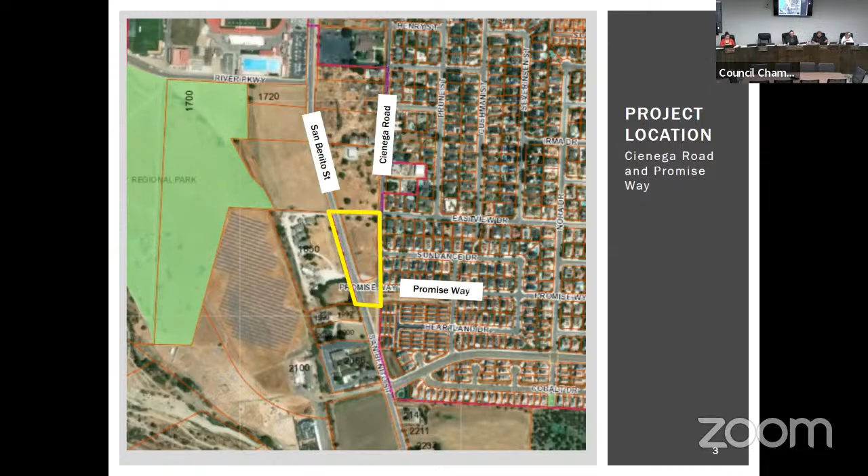To give you a little bit of background, this project has been under review for quite some time. On July 26, 2022, the applicant submitted an application for review. When an applicant submits their application for review, the planning division routes it to everyone within the development review committee. We meet with the development review committee and gather everyone's comments. There could be design comments at this point in an initial review, though there probably isn't because we're missing some information. But what we do is wrap together what we have and then distribute it to the applicant as one complete package.

And we did that on August 24th. As required by the Permit Streamlining Act, we are required to give them a list of everything they need to give us within that 30-day period for completeness.

The applicant then resubmitted in September. We then sent them comments in October. The applicant then submitted on June 8th and it was deemed complete.

The way that the Permit Streamlining Act and the Subdivision Map Act work is that once a project is deemed complete, we then have to move the project forward. We had to make a CEQA determination within 30 days of completeness. That was done, and once that determination is made, the Subdivision Map Act requires us to bring the project before the decision-making body, in this case the Planning Commission, for a decision on the project. So that's how we got to where we are tonight.

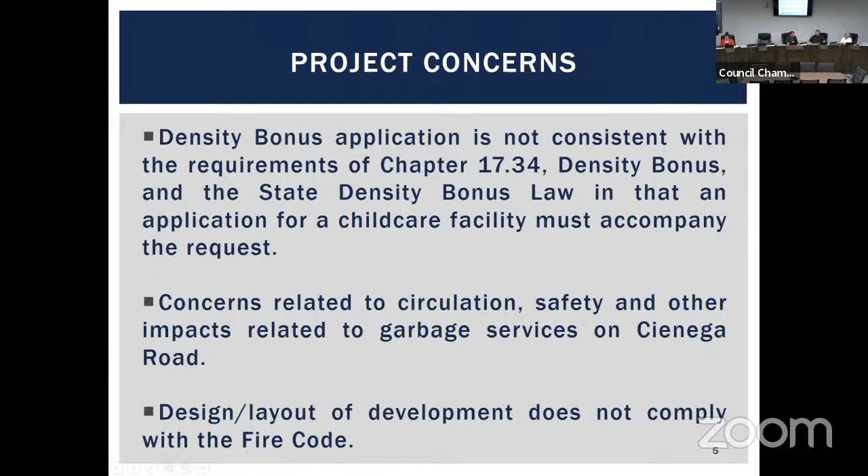With regards to the density bonus, in the last submittal we had two options submitted. That was because the preferred option has always been option A, which includes a childcare facility, and staff has had comments on that from the beginning. So in the last round there are two options, and I'm going to talk about both of them so we can fully discuss their project.

As far as the density bonus goes, they're proposing to restrict one unit for very low income, which is 5% of the total number of units. Because of that, they qualify for a density bonus. As part of that density bonus, they are requesting a waiver of development standards such as setbacks and lot coverage, which they're entitled to. They then get to have a density bonus of units, and what they're requesting is the maximum, so that's 4 units.

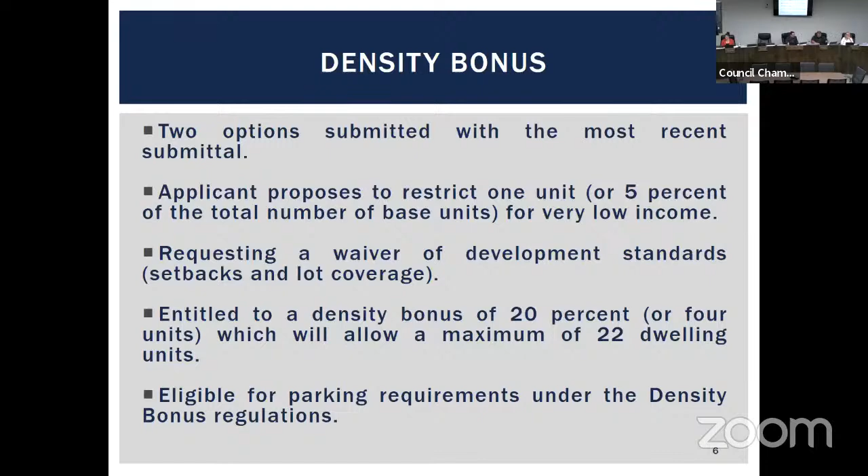That's allowed by the density bonus chapter as well as state density bonus law, so they are entitled to that. This increases their density on the site up to 22 units, and they're eligible for the parking requirements under the density bonus. With regards to option B, it meets all the requirements of the state density bonus law and our chapter 17.34. So there's no density bonus concerns with option B; it meets all the requirements.

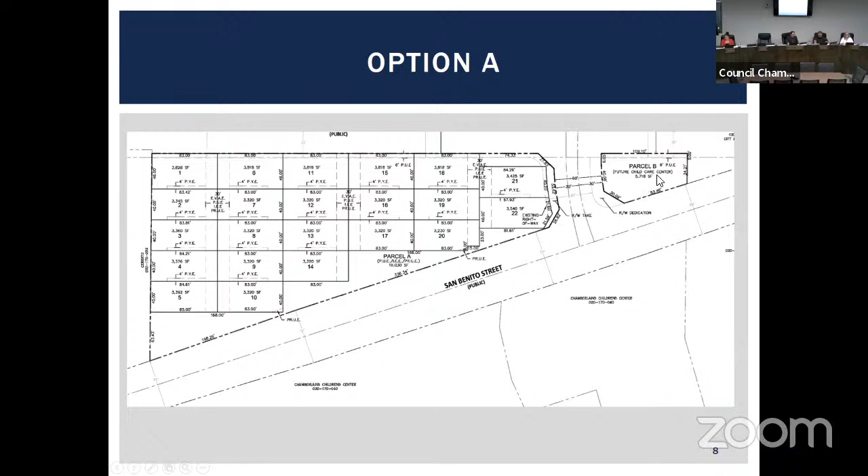Option A, however, then changes things. So option B has 22 lots for residential, and lot 21 becomes a larger lot, with this remainder lot becoming another house. Option A then changes it so all 22 are located within this area, and a future childcare facility is proposed on parcel B.

The concern that staff has with that is that both the density bonus law and chapter 17.34 are very specific on what needs to occur for a density bonus for a childcare facility. The bonus allowed is either related to the floor area or square footage of the childcare facility. So if you had a high rise, let's say, and 5,000 square feet is going to be a childcare facility, they get an extra 5,000 square feet as their density bonus if they wanted. Or they can have an additional incentive that contributes significantly to the economic feasibility of the construction of the facility. So the bonus that they're requesting has to be tied to the construction of that childcare facility.

As part of this density bonus, the applicant is requesting a waiver of the annexation fees for all the units, which is currently $13,500 per unit. The fee doesn't get paid until building permits are issued, so that fee will likely go up, but it would be a fee that the city would then pay on their behalf to the county.

As noted many times to the applicant, we are requiring a site and architectural review for the childcare facility. That's how we can first make sure that the incentive they're requesting is related to the construction of the facility, and also make sure that a facility could actually be constructed on the parcel. Our code requires that if you are requesting a density bonus for a childcare facility, you must apply for a site and architectural review and conditional use permit. It's in the code.

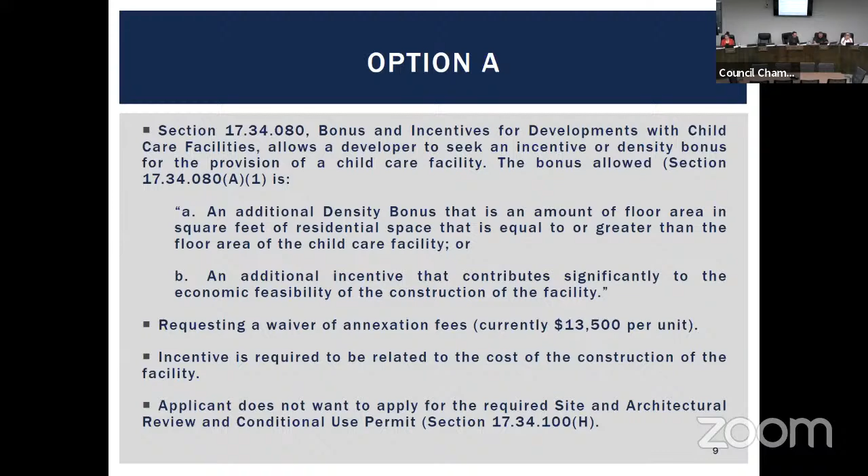This is a blown up image of the childcare facility. We don't have an application in for it. It's a 5,700 square foot lot. Can a childcare facility fit there? I don't know, I don't have the plan, I don't have plans in front of me. So that's another thing we're checking.

Could it fit? They're going to have parking, a play area, and then a building. Part of the reason for requiring that site and architecture review is so we can make sure it can be constructed, and that it will be constructed, since they would be requesting an incentive related to that.

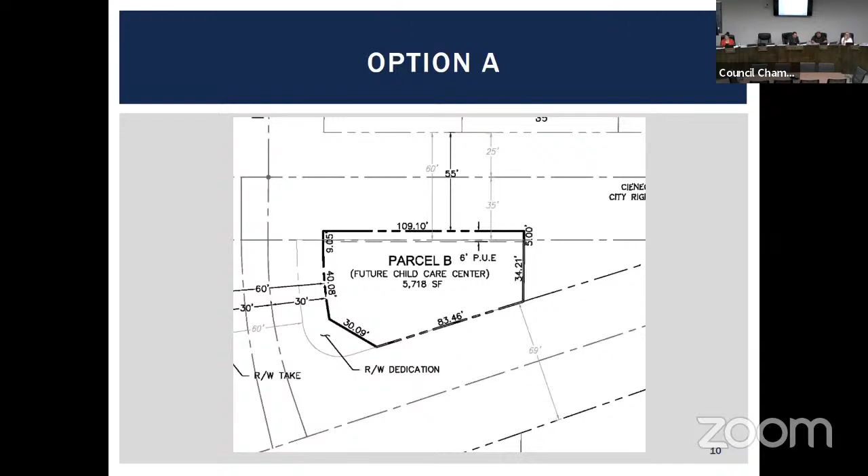As far as garbage service goes, this has been a comment from the beginning. Recology informed the city that they could not provide front door service because their trucks cannot back up the distance of the roads. So Recology said they would only serve them on Cienega Road, meaning every house has to take their can out to Cienega Road.

Every dwelling unit is now required to have three waste receptacles: trash, recycling, and organics. So at a minimum, there will be 66 cans on Cienega.

Now, if there's a JADU and an ADU on the site, there will likely be more cans, because you are likely going to require the person in the ADU or JADU to have their own trash service. If that were to occur, we would have a total of 198 cans on Cienega.

Each house with only 3 cans would require a minimum of 11 feet on Cienega Road if they perfectly place their cans.

Due to the layout of the roads, making sure that sight distance is maintained so people entering and exiting the development can adequately see onto Cienega to exit, and then the corner, there's likely only 6 feet available per house on Cienega. The larger concern is that this requires perfect can placement even with only 3 cans per house. It is unlikely everyone is going to go out there and make sure they are no more than 18 inches away from their neighbor's can, perfectly placed on Cienega.

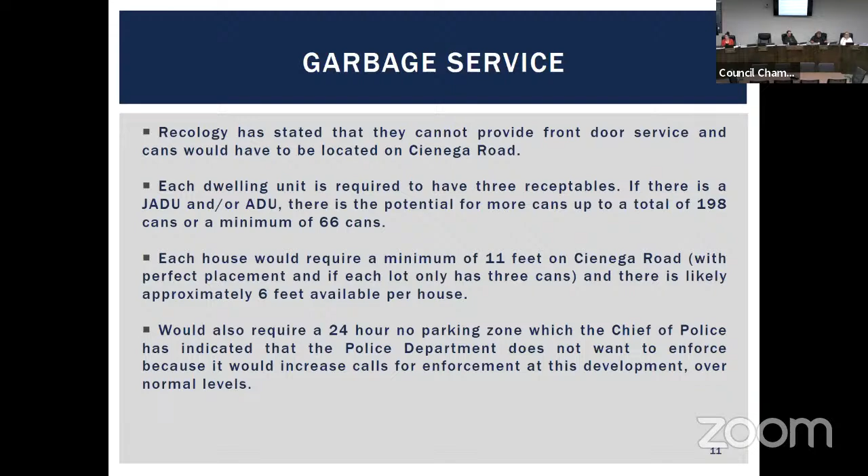Since the beginning, this has been a major concern for staff because of the likelihood that people are not going to place it perfectly. We're going to impede circulation in the area. And then, not necessarily a safety concern but expressed from the beginning, is that if you are in one of these lower lots, let's say 4, 9, 5, or 10, and you bought the house when you were younger and now you're older, or you have mobility issues, you have to take a can all the way to Cienega. And you have to find space for it. And it's 3 cans, you're going out 3 times. Right? So that is a concern that we have.

Just as allowing people to age in place or people with mobility issues, what happens 20, 30 years down the road if the layout is the way it is with the cans on Cienega?

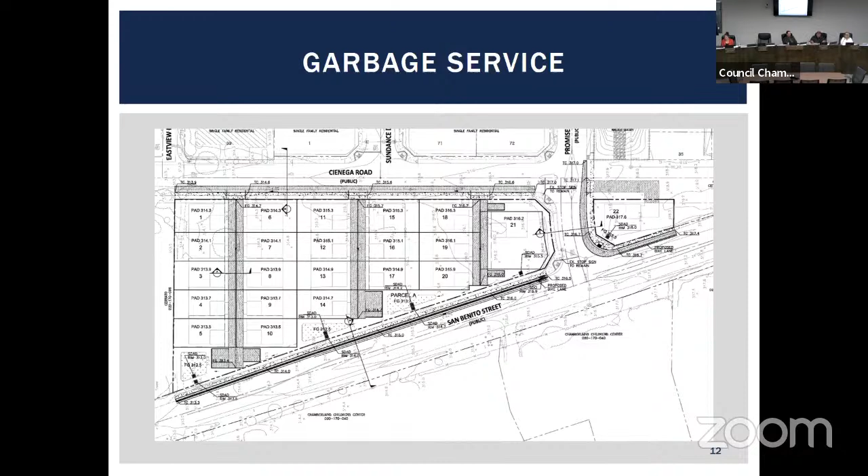The biggest concern that staff has is in regards to life safety. The fire marshal determined that the project does not comply with the fire code. The fire trucks cannot travel down those roads. So the fire truck cannot travel down this road and then back all the way up. So the fire truck will have to park on Cienega.

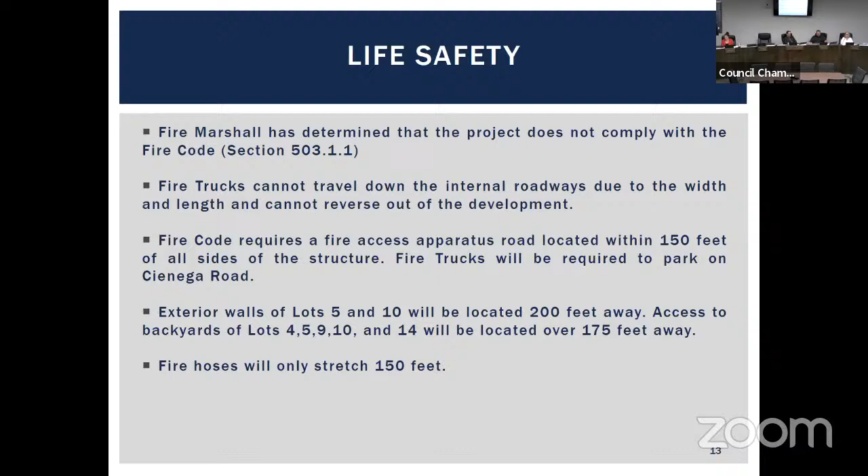The fire code requires fire apparatus roads to be located within 150 feet of all sides of the structure. So what that means is the fire truck will park on Cienega, and then there are a number of houses where the 150 feet rule is not met. So for example, if the fire truck parks on Cienega, these houses, all sides of the structure would be further than 150 feet away. Because there will be cars, potentially trash cans, potentially both on Cienega, it's likely that we'll also have an issue with these houses as well because the fire truck will have to be parked further away.

I am not the expert on fire code, so Charlie Bedoya, our fire marshal, is here tonight and he will go over the fire code from the fire marshal perspective.

Yeah. I'm going to switch. Chief Bedoya has a presentation as well.

Thank you, Commission and Mr. Chair, for having me. My name is Charlie Bedoya, and I am the Fire Marshal with Hollister Fire Department. Thank you for having me here tonight. And it's not just about fire hose, it's about actually fire apparatus access.

I have a quick little presentation. What do I press? Right arrow? Okay.

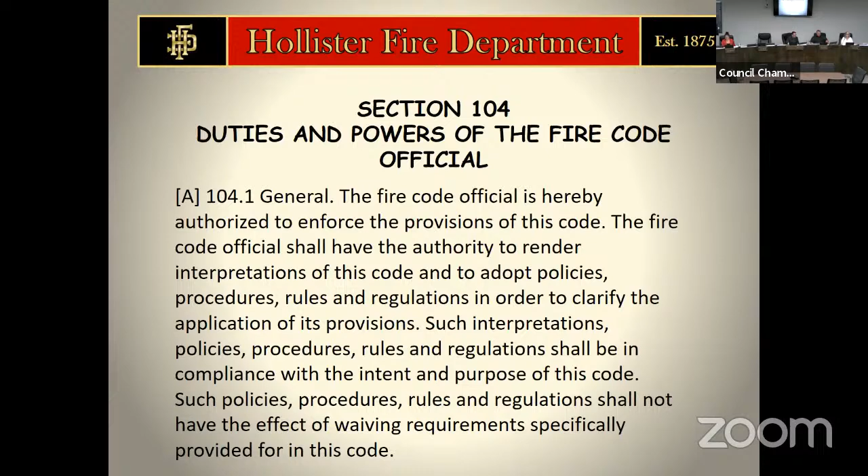Perfect. So this is straight out of the fire code, section 104, duties and powers of the fire code official. 104.1 general: the fire code official is hereby authorized to enforce the provisions of this code. The fire code official shall have the authority to render interpretations of this code and to adopt policies, procedures, rules, and regulations in order to clarify the application of its provisions. Such interpretations, policies, procedures, rules, and regulations shall be in compliance with the intent and purpose of this code. Such policies, procedures, rules, and regulations shall not have the effect of waiving requirements specifically provided for in this code.

So section 503 on fire apparatus access roads. 503.1.2, additional access: the fire code official is authorized to require more than one fire apparatus access road based on the potential for impairment of a single road by vehicle congestion, condition of terrain, climatic conditions, or other factors that can limit access. 503.2.2, the authority: the fire code official shall have the authority to require or permit modifications to the required access widths where they are inadequate for fire or rescue operations, or where necessary to meet the public safety objectives of the jurisdiction.

And then dead ends, this is what it's all about. 503.2.5, dead ends: dead end fire apparatus access roads in excess of 150 feet in length shall be provided with an approved area for turning around fire apparatus.

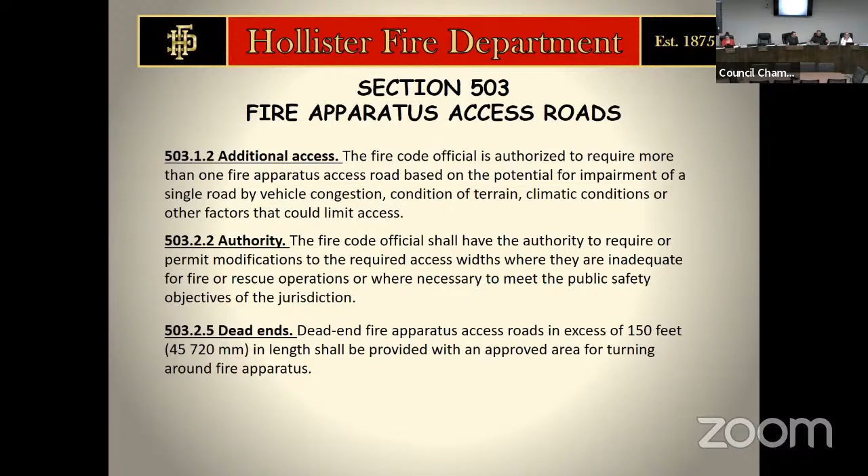Section D103, minimum specifications, access road with the hydrant. So this is just good information to have out there. Where a fire hydrant is located on a fire apparatus road, the minimum road width shall be 26 feet. So fire access road is normally 20 feet, but anytime you put a fire hydrant on the road, you have to expand it out to 26 feet wider. It took me a few years to catch that, but I finally got it and understood it after being here for a little bit.

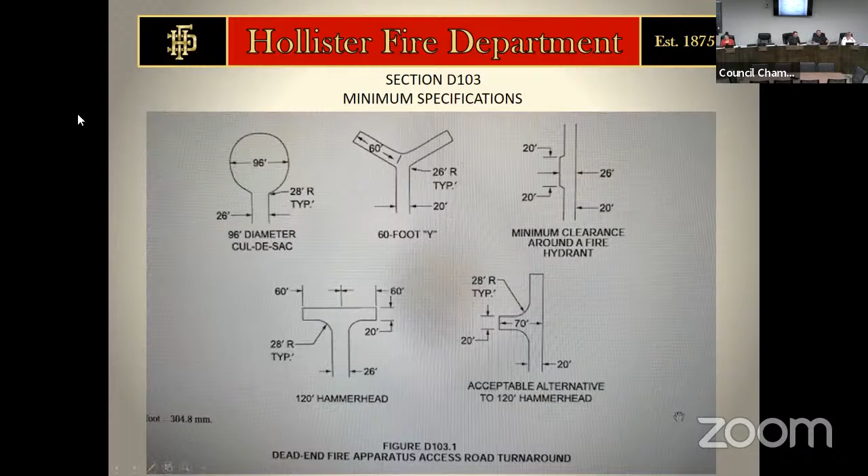Then you get into the 501 to 750 range, it gets into 26 feet, and over 750, we have to figure out something else, probably a second access or a third access.

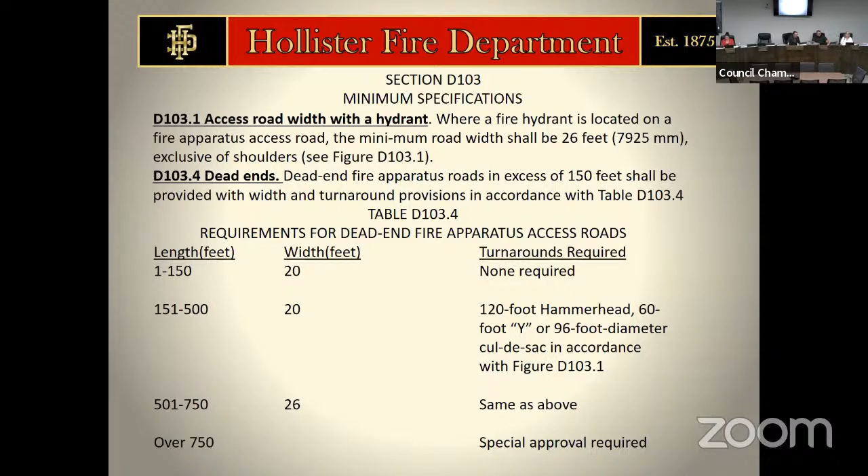You have to understand, on those fire apparatus roads, you have to put up some signs, either paint the curbs red that says fire lane no access, because roads 20 to 26 feet, you can't have parking on both sides of the roadway. If you have roads 26 to 32 feet, you could only have parking on one side.

So these developments usually can't have parking on any parts of the roadway. That would impair fire apparatus and even the garbage trucks too, but I'm more concerned about the fire apparatus. Wider than 32 feet, then parking is allowed on both sides.

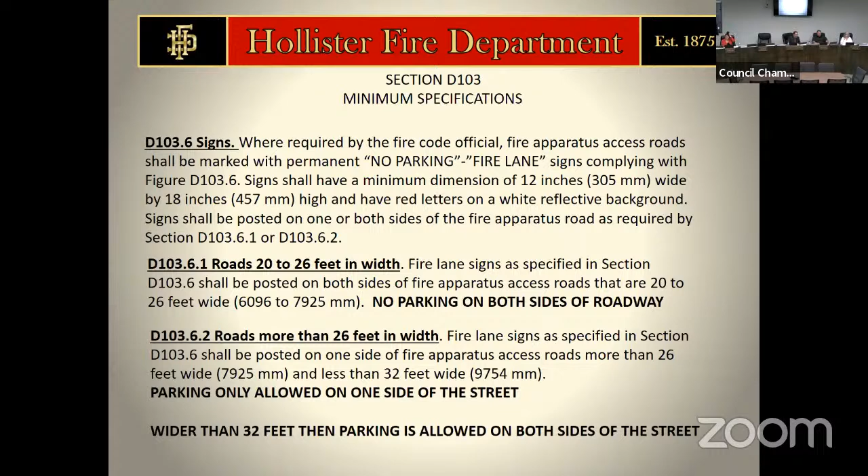So with that, I did some investigations on some developments that we've had in town. Heartland is one of the developments, across from the Presbyterian Church on Cienega Road. I was told Heartland doesn't meet it, that Heartland could get away with it. So I went down to Heartland. If you look at Heartland where the T is in the middle, you see how it tees off.

I went to one of the driveways down there. The streets are 20 feet wide, but they're only 144 feet in length. So does that require a turnaround? No, it doesn't. It meets the code, and I showed the measurement right on that part.

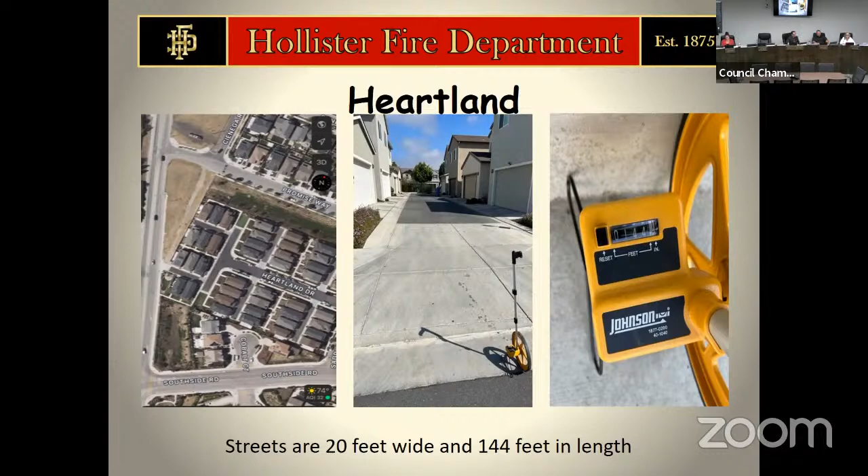Also in Heartland, you see the hammerhead or the T over there. I measured from the middle of the T to the end - it's 115 feet one way and 115 feet the other way. But if you look, it's red on both sides of the curve too, because it doesn't meet that 32 feet or 26 feet in width. So that whole T is red, fire lane, no access.

So that gives us the proper turnaround to be able to pull in, back up, and turn around where we need to go.

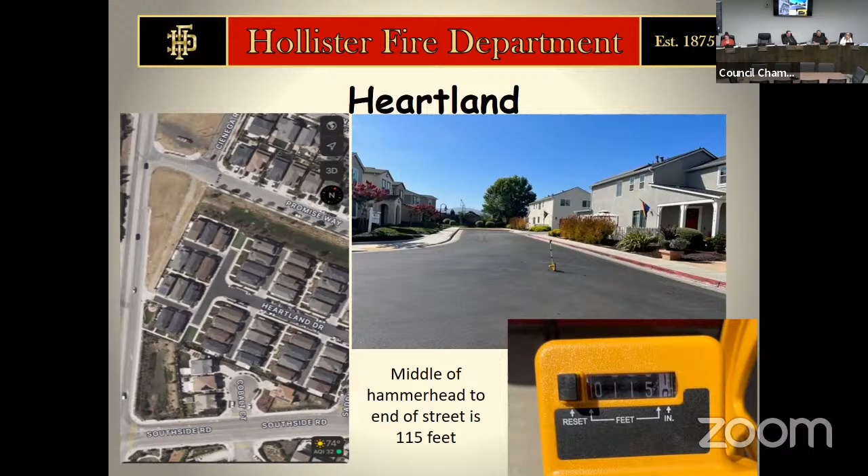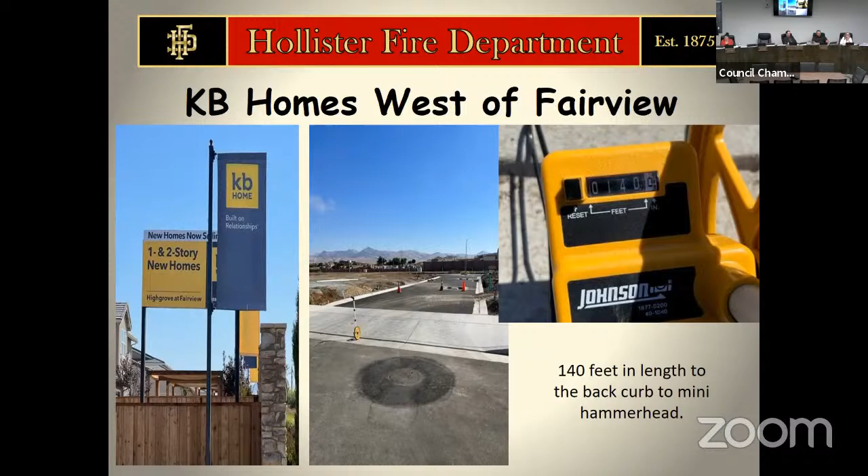KB Homes, west of Fairview - that's a development that's getting built right now. If you look at the middle picture, they have these mini developments with like 3 or 4 homes. The farthest it goes back from the street is 140 feet to a mini hammerhead. So that doesn't require a turnaround.

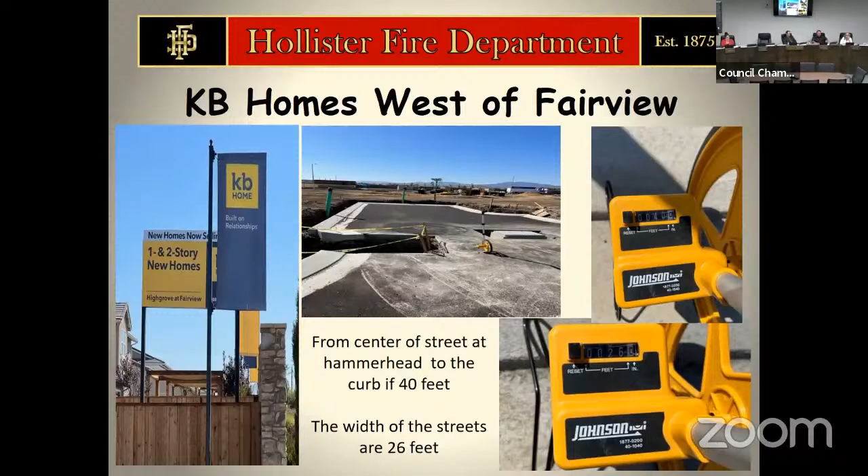But in that back little hammerhead, it goes back 40 feet for a total of 80 feet in both directions, so 40 feet - we could get a fire engine back there, back it up, and turn around. Their widths without a fire hydrant are 26 feet wide, which gives us a little more playroom to move around.

Allendale, here's a good one, north of Park Hill. If you look over on Allendale, right under Shearwater Street, you see that little U right underneath there? This is a perfect example - it's Egret Lane and Raven Street.

I started at the beginning of the street in that left-hand picture and walked 150 feet - that's shown in the second picture. I continued a little farther to the end, and it was 203 feet total. So yes, our hose can reach it, but it doesn't meet the turnaround standards since it's past 150 feet, so we have to have a turnaround.

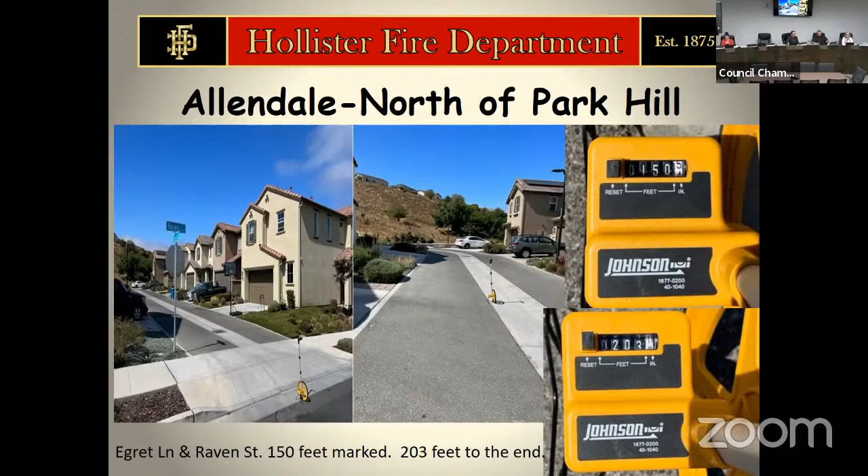So what they have is it drives around in that big U through the other side of the development. If you look at this next picture, here's the second part of the street where the U's out, and from the beginning of the street to the back of that U, it's 196 feet - you see where it kind of U's out.

In addition to the proper turnaround and the continuous U that goes through there, they have a 12-foot fire supplemental access road behind the homes. So they went above and beyond and added some extra access for us if needed.

So all this is per the adopted 2022 California Code of Regulations, Title 24, Part 9. Any questions?

I was curious about the 150-foot rule. I'm trying to understand the principle of that. Is it that if a fire truck has to back more than 150 feet, there's just more risk of an accident, killing firefighters, people getting run over? They have backup cameras, but if we need to move out in haste because we're on duty 24/7, we might have to clear a call.

If we're having to back out, we have to have people out on both sides, backing up slowly and guiding them all the way out. Whereas if we have the turnaround, we could go up forward, turn around, and drive right out without having to put people's lives in danger.

Any other questions for the fire marshal? Well, you do run the risk of having fire really close to your fire truck when you go in there. If you had multiple structures, that could get tricky. We want to be able to pull up as close as we can to the fire. We care about the fire engine, but we also care about the exposures and life safety, about the fire extending to someone else's property.

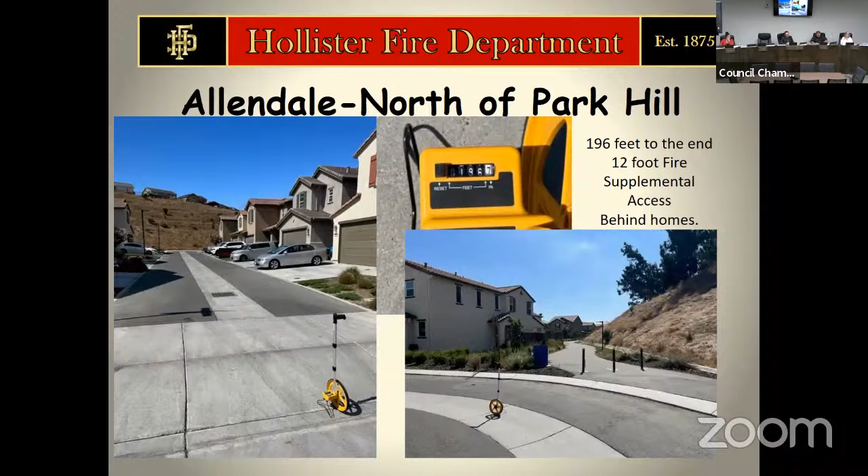Thank you. And it's about the turnaround, it's not about the fire hose reach, because we could reach it with a hose. It's about turnaround and it's all about life safety. Okay, thank you, Chief.

Following completeness, staff is required for all projects to make a determination on whether further environmental review is required under the California Environmental Quality Act. In this case, due to the concerns on Cienega and the fact that the fire marshal has not approved the project and indicated that it does not meet the fire code, staff identified the potential for significant impacts related to the development. To fully study it, a negative declaration or environmental impact report would be required. Those are very costly to prepare.

So under the California Environmental Quality Act, section 15270, projects which are disapproved are exempt from CEQA. In this case, where staff is recommending denial at this point, no further environmental review would be required. But if it were to move forward as is, some level of CEQA review would be required.

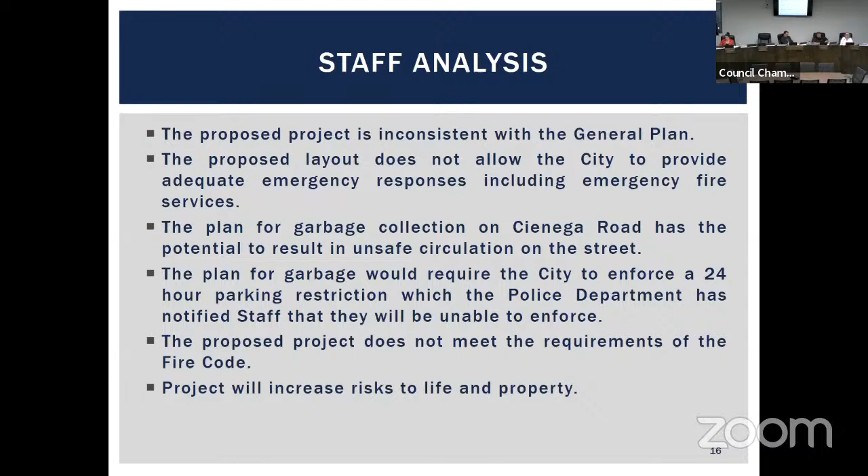For example, windows on a second floor and above used to be able to extend all the way to the floor, and that resulted in loss of life. So the building code doesn't allow it anymore. Codes are ever changing, and the zoning ordinance is ever changing too. Projects that were approved even 15 years ago are likely not going to be approved today if they came before us, because of the way things change.

Staff has prepared a resolution. The city attorney has looked at it and all the findings are in there for denial of this project. We are recommending that you adopt a resolution denying the tentative map and the density bonus. You could also choose to continue the hearing and provide direction to staff if you chose to do so. I would be happy to answer any questions you have, Planning Commissioners. That concludes my presentation.

Okay, any questions for staff regarding the presentation? Withholding any comments until after the public hearing? Just any questions?

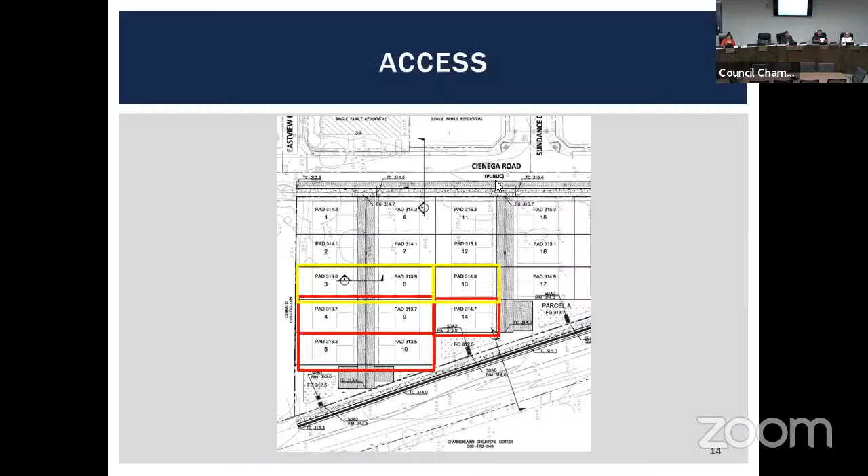Site and architectural, item number 1, site and architectural review 2022-6. Thank you, staff, for the report. Thank you, Chairperson Henderson. We'll begin with the staff report by Magda Gonzalez, and then we have members of the Starbucks team here to also discuss. This is kind of a discussion about some design issues that have come up on the project for your feedback. Magda, go ahead.

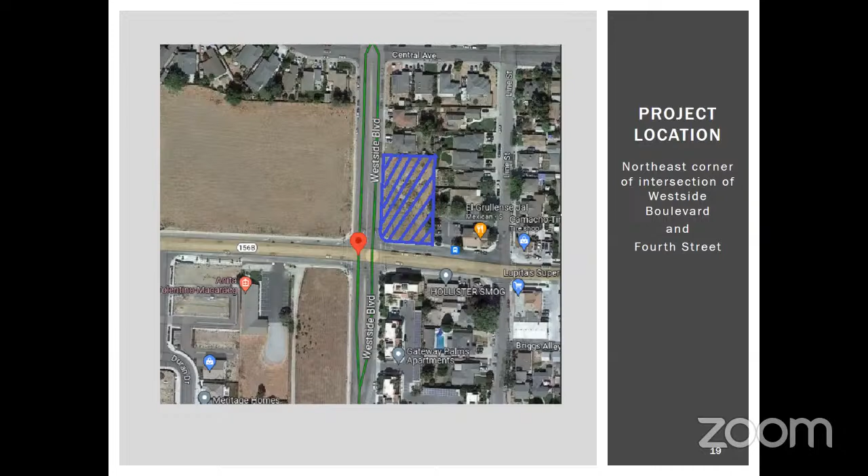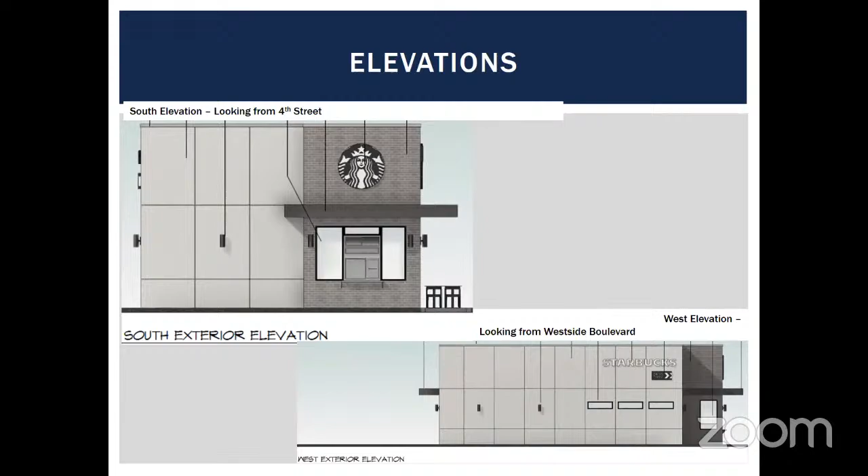Next slide, please. These are just additional elevations from the south side of the building and the west side. Next, staff, upon reviewing the proposed site plan, identified certain concerns specifically related to pedestrian orientation and safety.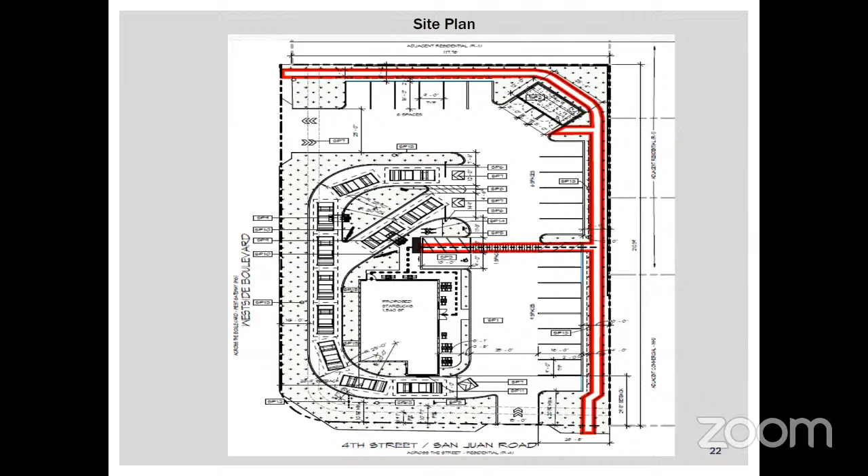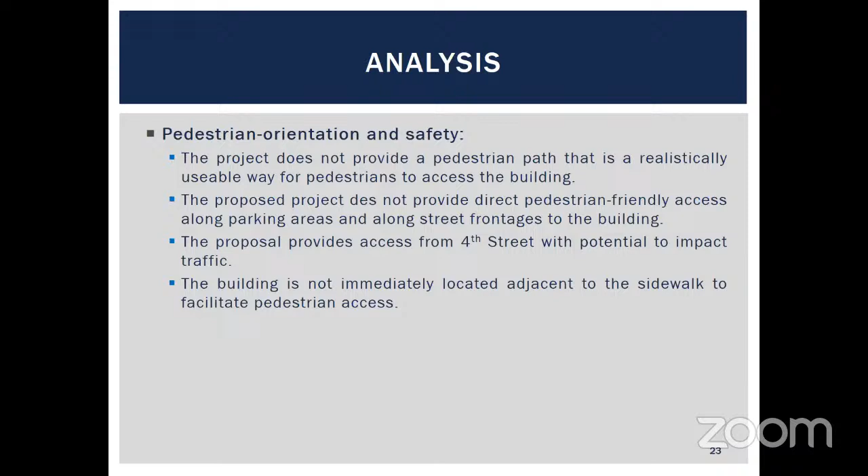Staff communicated these concerns to the applicant and their team. We've met with them a few times and gone over different options. They have been receptive to our concerns and have provided a revised option, which we feel has addressed some of the concerns we previously had.

They have now provided pedestrian access off of 4th Street and Westside Boulevard. They have located the building at street frontage, and they have granted access off of Westside Boulevard.

We suggested or recommended reconsidering relocating the trash enclosure, which is currently located on the southeast corner of this slide, to eliminate it and either put it on the north property line, as labeled option A along Westside Boulevard, or relocate it to 4th Street on the left-hand side, labeled option B.

We provided these alternatives to engineering, the fire department, and Recology for their consideration. Engineering did express some concerns, and we do have engineering here on the call to address those concerns. Recology said they would opt for option B, a more feasible option than option A. The fire department also indicated they didn't have concerns with option B.

The main concern is that there are still issues when it comes to queuing. We would be eliminating the previously proposed entrance off of 4th Street and limiting access to just Westside Boulevard, which can create the potential for queuing and perhaps issues with Recology and their trucks entering the site.

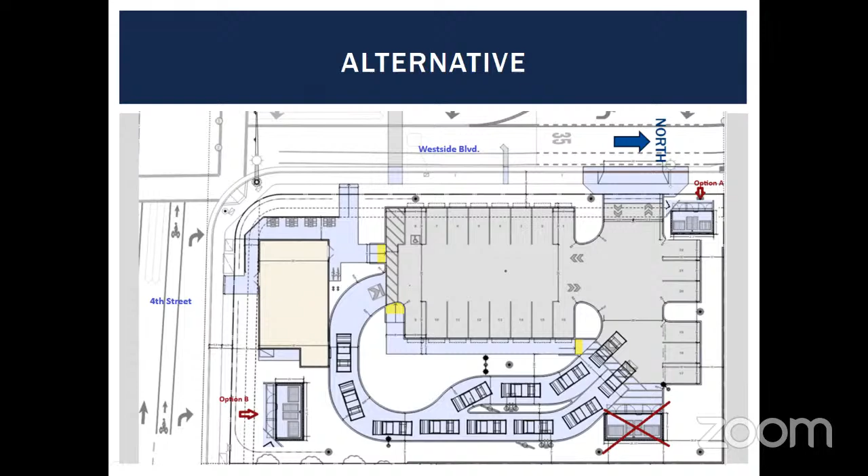Like I previously mentioned, we feel this option addresses a lot of the concerns we previously identified when it comes to pedestrian safety and building orientation. I've outlined some of the items we previously identified and provided to the applicant that we feel have been addressed, although there are still concerns when it comes to queuing and access to the parcel.

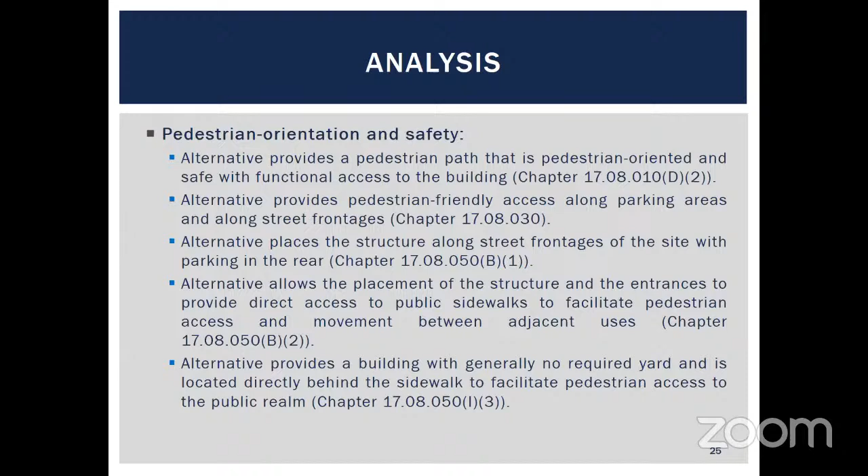As I previously mentioned, we are here for you to ask any questions or provide feedback related to the design. Once the applicant provides their presentation, you'll be able to see the different options and why they wouldn't work, and why we feel this one has more potential than what they originally proposed. That completes my presentation.

Okay, so we have the applicant team here, give me one moment. We're going to pull up their presentation with some alternatives they've been working through with staff to try and address some of the issues. Because the site is so constrained, we're running into one issue or the other. That's really why we wanted to have this study session with the Planning Commission, to get some feedback before bringing this item for public hearing.

Oh, you put it in there. Okay, sorry, their presentation didn't get on the network, but we are getting it.

Well, while we wait for that.

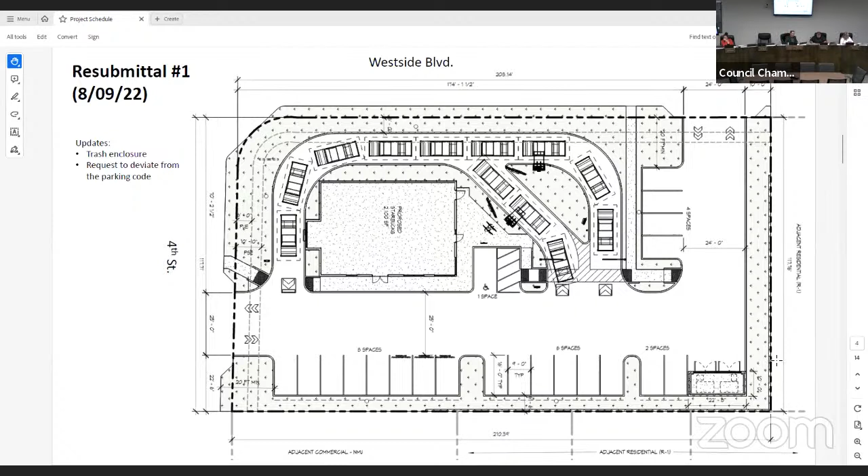So, next. Here is our initial submittal, which was lacking in a few things. We received feedback from staff and resubmitted. In this next one, we modified the trash enclosure and made a couple small modifications at staff's request and Public Works' request.

And then the next one here, this one... oh yeah, we had a parking issue. I'm Callie, part of the applicant team and also part of the ownership. In the previous submittal, we asked for a deviation for the parking calculations. In this next slide, we shrunk the building because we weren't able to get the parking calc deviation, so the building footprint becomes about 1,500 square feet, and then we make the 21-stall calculation.

And then the next slide - okay, this one we modified. This one we only had one access on 4th Street, which is entrance only, and modified the exit of the drive-through to steer cars back onto Westside to prevent them from going out on 4th Street. We also added a median to prevent anyone southbound on 4th Street from turning left into the site. This next one is just a minor modification of restriping Westside.

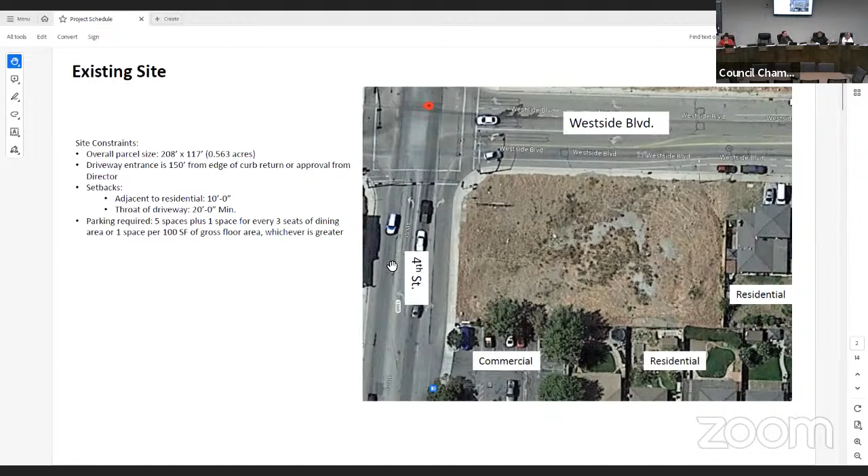We'd have to go back to whichever alternative we're looking at as far as where I think that's their, how would you stage 20 cars anyway? I don't see it, maybe you'll have to show me how you're gonna do that. So coming in from Westside, those are each cars, right? Yes, correct. Well, there's only one there, 13 or so, 1, 2, 3, 4, 5, 6, 7, so if you could just imagine where it would loop around and go out to Westside. Yeah, not good.

Your comment about the speaker technology is advanced. It's directed, it's all computerized, it's all at ambient. How's it still - they got to place an order and there's a speaker, and it's at the ambient noise level that is right in that vicinity. So an allowable noise level is what the ambient noise level is.

Operationally, we feel comfortable that the site will accommodate the volume that we project for this store and keep it on site. If we let that spill out onto Westside, we're gonna be called the dumbest planners ever.

That's what we have in front of us. That's why we're looking for guidance. So from a public works standpoint, this provides the most backup stacking. This is pushing 20 cars. The other one satisfies more the goal of the planning department, but not the public works department.

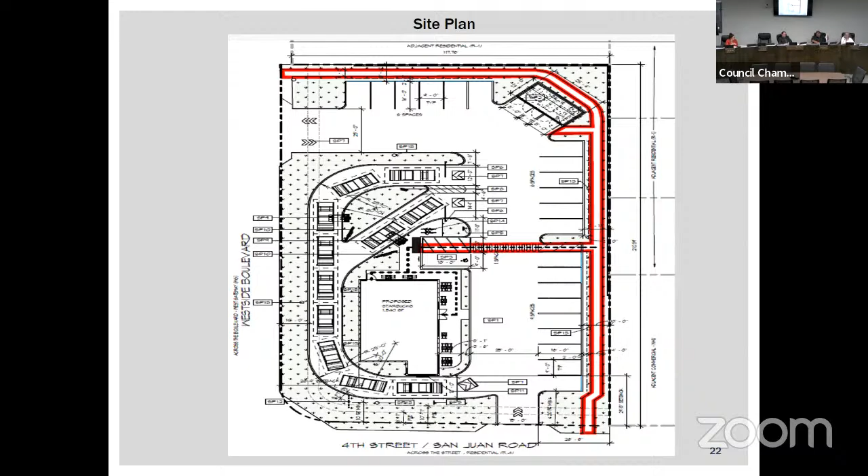I had a question about option 2. I was wondering—you mentioned there could be a potential issue of cars getting landlocked in the parking lot because of too many cars in the drive-through lane. Is there any reason why the end of the drive-through lane curves back into the parking lot, rather than having an option for cars to go forward with a second driveway so they could exit straight after pickup?

It's too close to the intersection. Yeah, it's too close to the corner. Okay, thank you. Those two drive locations are the only things that are fixed, and that's just how it works. Okay, yeah, got it, thank you.

Yeah, I mean, there's a few things that we could tweak and maybe add another one or two on this. Our goal tonight is to come away with something that we could work on. I mean, obviously, we've had 20 plus, we're a couple years into this, we're looking for direction.

Operationally, we think ours operates the best and will minimize any problems later on down the road. That's just our experience. This satisfies what we think the planning requirements and staff expect. This enhances, I think, what the planning obligations are about being on the street. A little better pedestrian access.

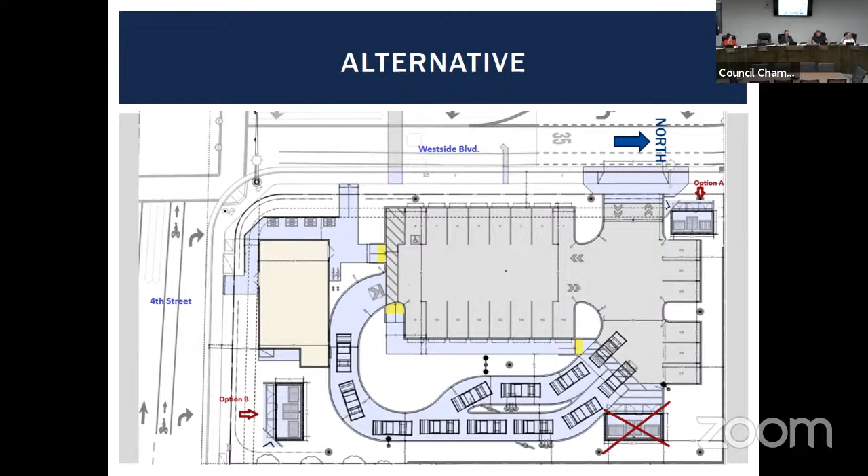Why don't we encourage more community space there by creating some type of outdoor area, covered, with trees, however, that would kind of encourage that, reduce the amount of people actually going through the drive-through, and start to include more pedestrians. If we could go to the preferred option, we do have an outdoor community area.

It's kind of a double-edged sword. The more tables we add out there and the more seating, the more parking you require, and we can't fit any more parking. I mean, we would love to enhance the outdoor area. I mean, there's that opportunity. We could add 2, 3, 4 more tables out there, but it would require more parking.

Is there any way to give an exception on the parking legally to make things fit better, because it is 60% drive-through, and make a little bit more of an outside eating area, like Commissioner Rossi's suggesting? I know we hold everybody to parking requirements, but is there a tool?

Well, so Amber, it looks like she's looking at it. There are some instances where parking reductions can be granted, and I think you considered one at a previous meeting, right? So there are some ways that we can do that, but let me let the staff do their research over there, and we'll get right back to you.

And I didn't mean to interrupt you. I'm sorry - if a councilman doesn't get it out, it's gone. To the extent that we can enhance the outdoor area, yes, we would cover it and do what we could to make it more inviting so that you could use it 10 or 11 months out of the year.

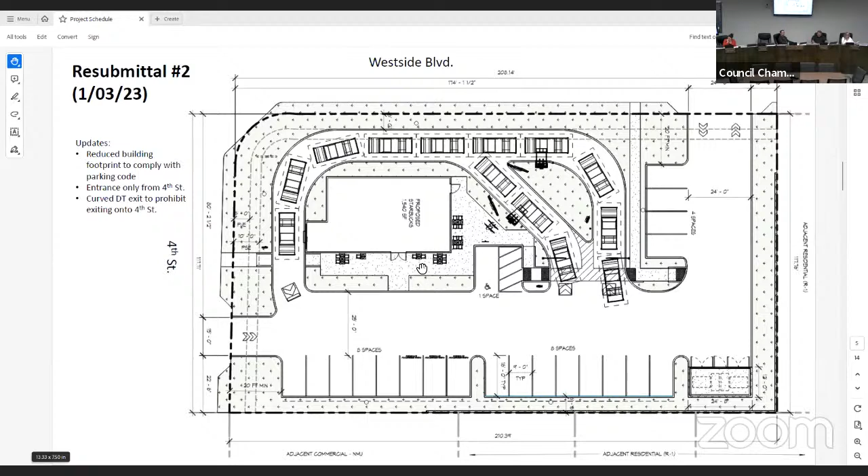So it's kind of the long path that a pedestrian isn't naturally going to take—they're probably going to take this more direct angle instead. There have been alternates for where the pedestrian enters from both the Westside and Fourth, proposed by the applicant, so we welcome discussion from the Planning Commission on where that might be best. This has been the preferred option, giving the most direct, obvious path, because if you tell a pedestrian to walk all the way around, they're not going to do it. That was staff's concern—yes, we're providing a sidewalk, but will people actually use it?

Then we have a second option for the pedestrian path on Fourth, which is a bit more direct. We've looked at a really direct path, a mid-direct path that crosses the drive-through lane, and the most indirect path as options we've considered with the applicant. We would expect the Fourth Street pedestrian access to be the more popular of the two.

I have a question I've never asked in these meetings, and I'll need to look at other sites—are there any local examples where pedestrian access goes from the public right of way across the drive-through, like on San Felipe?

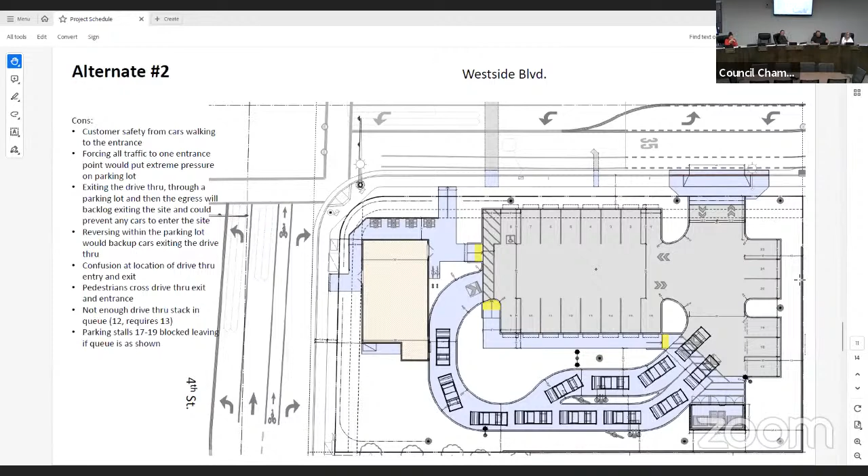Okay, it might be something that staff will definitely do, but even if the planning commission wanted to take a look at that as well, I mean, what does it feel like? I'll definitely do that and encourage my staff to do it as we work through these issues.

Like I said, they checked that Starbucks crossing as well as across the street. McDonald's has that in their parking lot with Ace Hardware, same thing. Pedestrian access off their sidewalk where there's a stop sign for the drive-through traffic, with wide yellow bump dots that designate they have the right of way to go through. So it's not uncommon to have them cut through.

But what I was going to ask you was on the preferred option, if we made parking allowances and were to eliminate the 4 spots on the Westside Boulevard entrance - are you saying the preferred Starbucks option? This one, the preferred option. Okay, if those 4 spots were eliminated, would that possibly generate up to, I think I'm looking at another 6 extra vehicles that could possibly queue?

And then the win-win situation for more outdoor seating - there's already 2 different pathways. We could then create that into more covered outdoor seating and make it even more. Well, most likely those 5 stalls, I think 4, your top 4 stalls, would be associate parking.